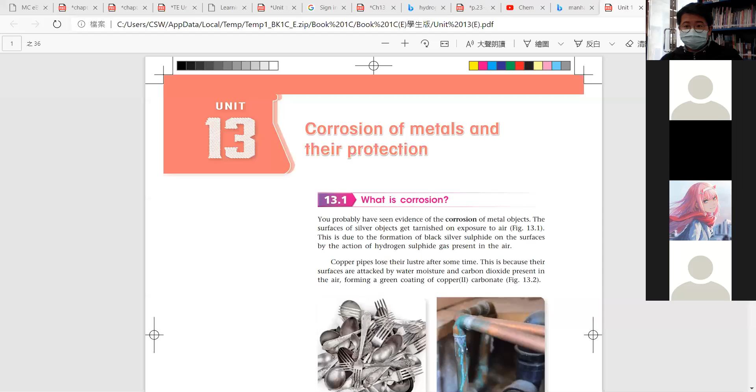Okay. Absent. Now today, we would like to have an overall revision on chapter 13. Do you find this chapter difficult? Not really, but you should know some of the key points about this chapter. Now, when you compare to the chapter on reactivity of metals, it also talks about the chemical reactions of metals, but we focus on a rather slow reaction. Deterioration.

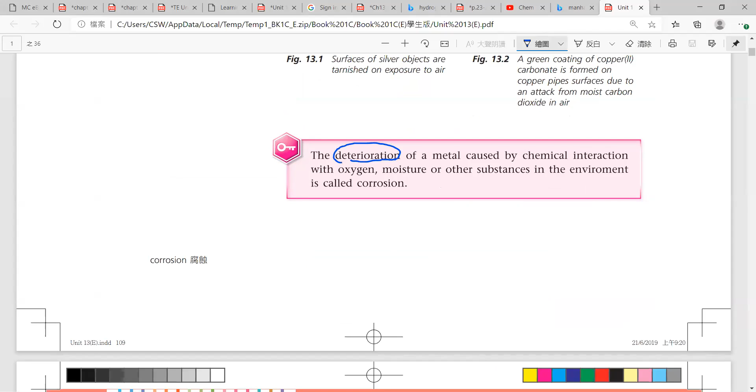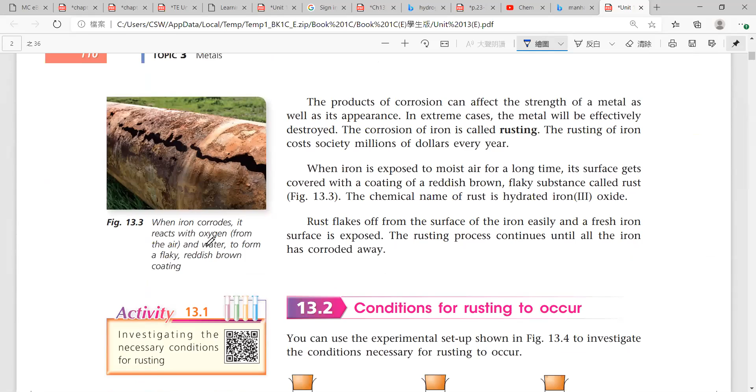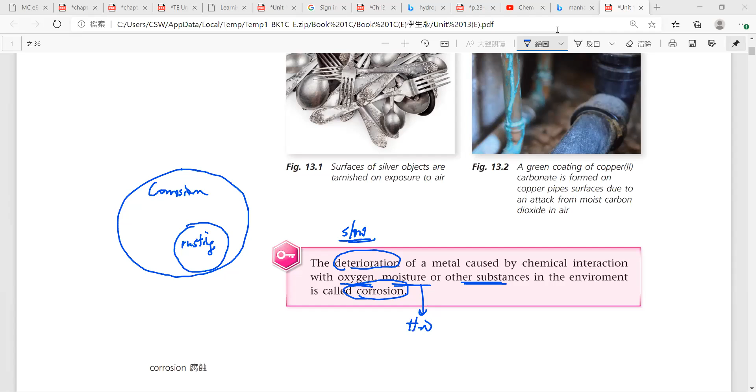Especially a type of slow deterioration of the metal caused by the chemical interaction with oxygen, moisture, which means water, and other substances in the environment. We call it corrosion. Now, corrosion and rusting are just a big circle and small circle. Corrosion is here, while rusting is just here. So what is the difference between corrosion and rusting in terms of wordings?

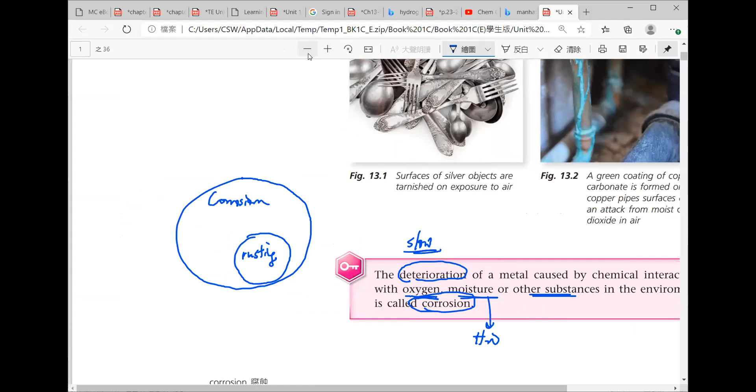You have to solve it, right? By typing on the web and searching, right? Can I have Leung Ka Kit? Tell me the difference between corrosion and rusting. Are you here? Corrosion 係好似大部分 metal 都係，而 rusting 就係即係 iron 啦。

So you pinpoint the use of these terms to tackle the oxidation of metal, right? All metals, when they react with oxygen or water or some other substances, we call it corrosion. And rusting is the corrosion of what? Of iron. Okay, so this is a very special term. Can you get my point? You can never change the use of this term if you want to talk about rusting.

So 生鏽. Why is it 鏽? We call it rust. It is something like a reddish brown crust. So if you want to talk about 鐵鏽, we call it iron rust. But of course you may think of some other term which borrows the same thing, 鏽. For example, have you ever heard of the term 銅鏽?

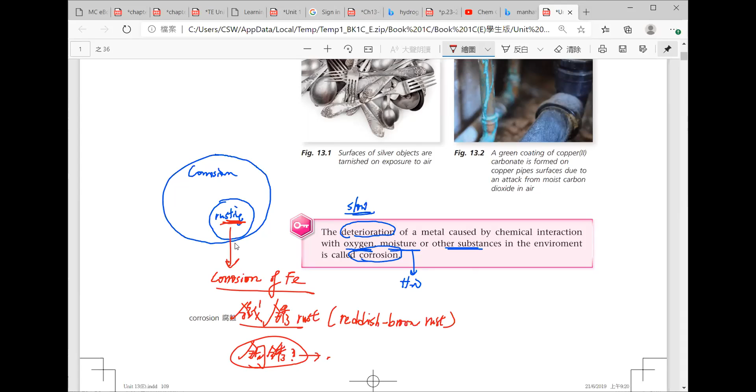I don't know. You don't know. You take a look at the book here, 銅鏽, on the right hand side of the book here. Oh, okay. Yes, it's green. It's green. So as said before, even if you want to talk about it, it is a type of green patches, right? Found it here.

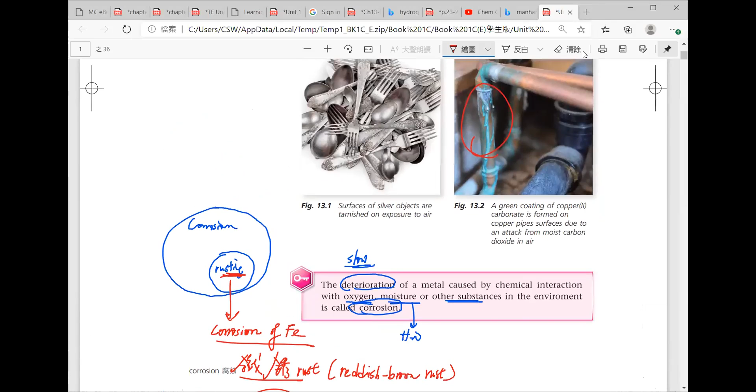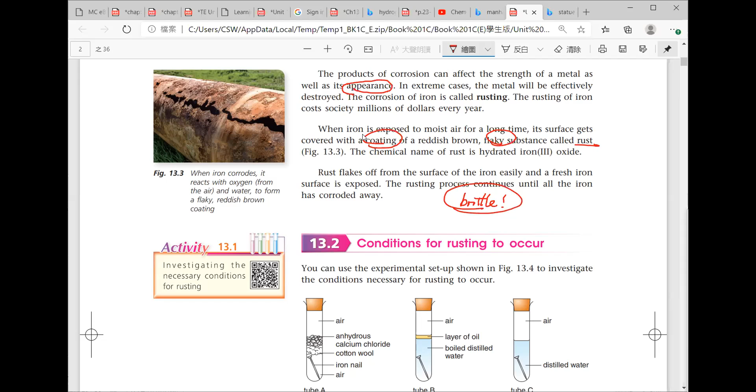We call it rust. But one thing that we find very terrible is that it is brittle. Compared with uncorroded iron, which is strong and hard, once it changes to rust, it is brittle. This is what we don't want, especially for iron objects with their own uses, like bridges, building materials, etc. So it raises some safety concerns.

If it is brittle, it cannot withstand so much force, so much weight. So all of a sudden it will break down. So this is what scientists, but also the general public, pay much concern to. It is also something about money. We have to preserve the form of iron.

But sorry, according to nature, iron will finally go back to its most stable state. It is rust. So we are now going to have a competition with nature. As the Chinese saying goes, 我哋逆天而行啊.

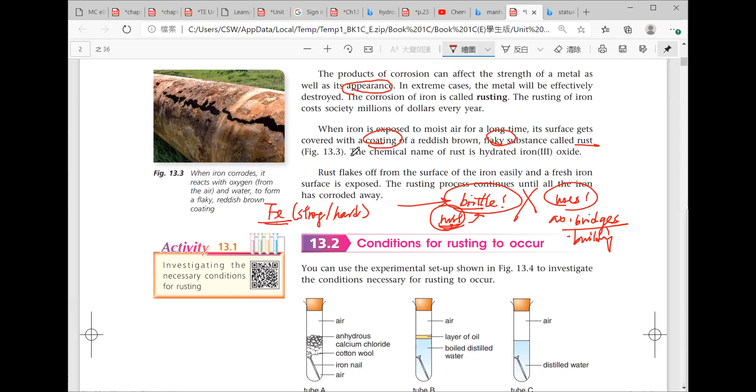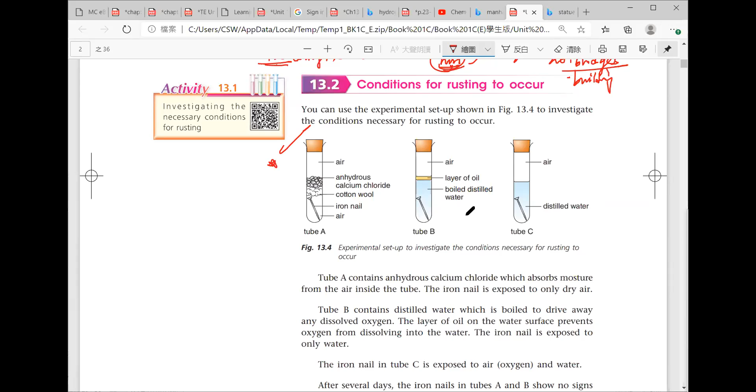So that's why we need to think of some protection method to slow down or even stop their corrosion, because it affects not just safety but also the cost. And in order to get to know more about that, you should know the conditions for rusting to occur. So you may see this diagram. Please put a star here; you need to pay much attention to the design of experiments, the purpose of those chemicals, as well as the results.

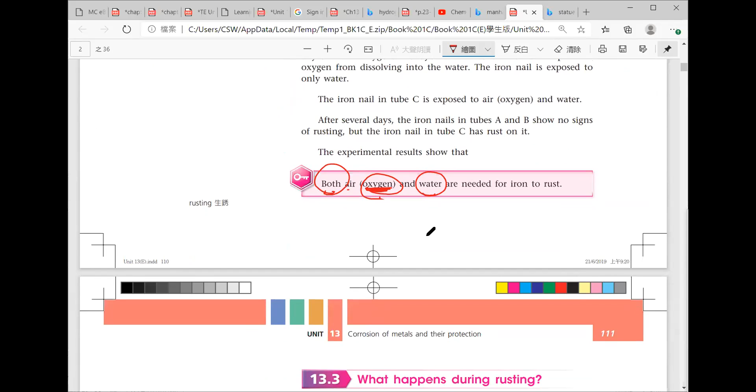So the result is that the essential factors are oxygen, circle them, and water. We need both of them present in order for the iron to rust. And second, for the rusting process, the shortest time for it to be easily observable is 1 or 2 days. It depends on the humidity of the surrounding environment. If it's very humid, in only 1 or 2 days you can see signs of rust, which as said before is reddish brown. But it won't wait for you for so long a time.

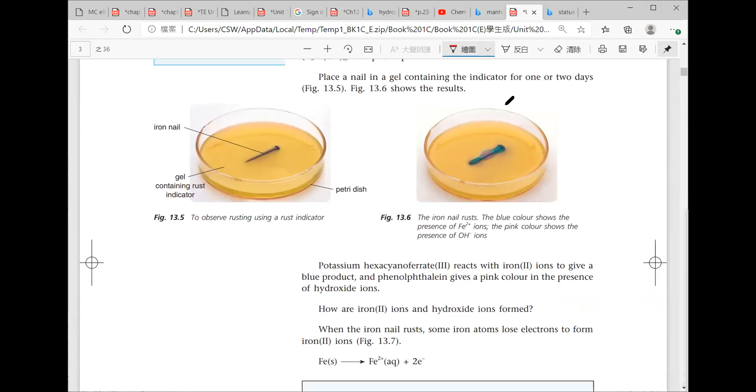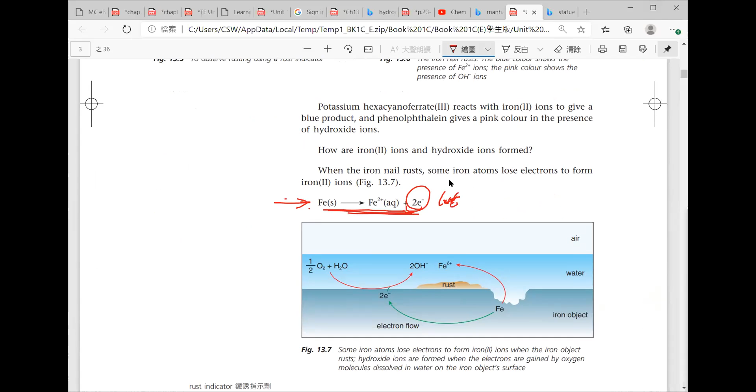So what we can do is spot the most crucial step. If the crucial step has started, it means that rusting will occur. So what is the crucial step? This is the first step, half of the first step: the reaction of the iron. They will lose electrons. And at the same time, the essential factors, oxygen and water, will receive the electrons lost from the iron to form hydroxide. So both chemicals are present in the very first step of the chemical reactions, and we are going to spot them out.

So that's why we have got the rust indicator, which has two components. Each one of them is used to test for each product. For example, potassium hexacyanoferrate(III) tests for iron(II). Phenolphthalein is used to test for hydroxide. They will turn the color blue and pink respectively. So what is that blue? A very special blue.

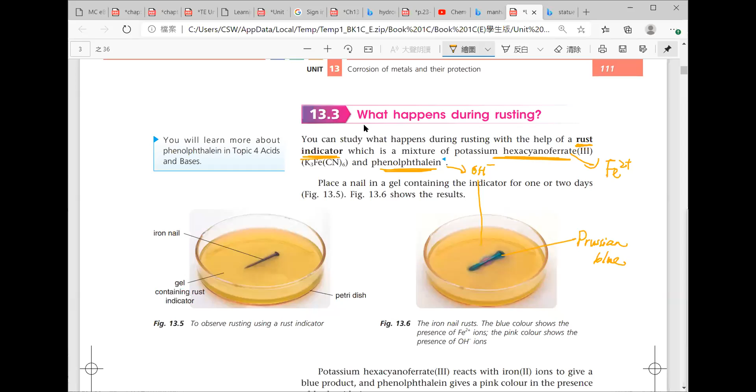Have you ever heard of the term Prussian blue? 普魯士藍. It is the color that you may find in some countries, right? They were very famous for having produced that blue. And hydroxide, once it meets with phenolphthalein, will turn pink.

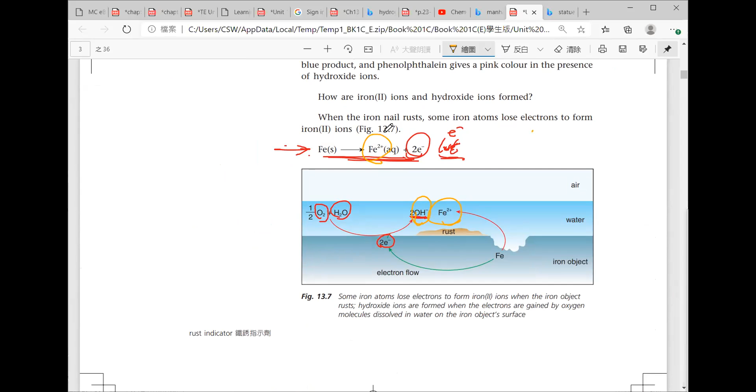And by having the indication of the first-step reaction, what I mean is hydroxide and iron(II), we would say that if I can monitor the first step of the reaction, we would have much belief that the subsequent chemical reactions will happen such that the iron will form rust. So those two equations you should memorize, and these equations should also be memorized. The steps in between are too complicated, so I don't want to spend too much time on that. Just focus on this.

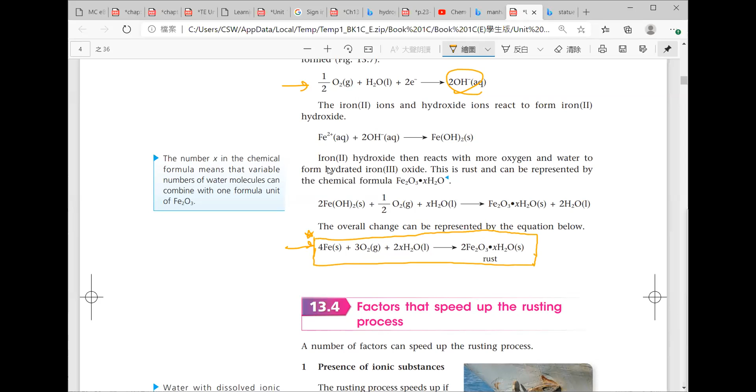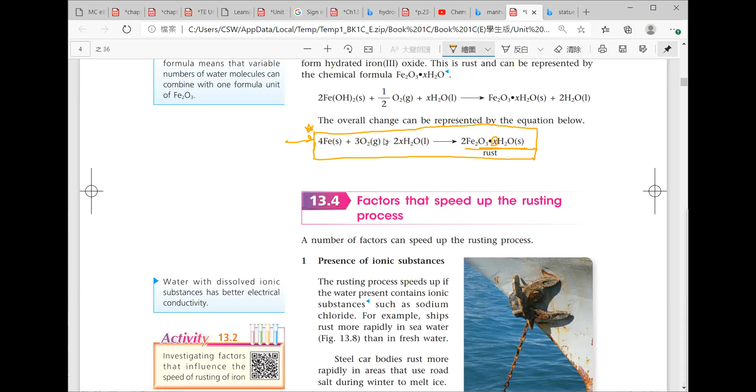So this is what you know about rust formation and the equation, and this is the chemical nature of rust. Can you see that xH2O? What does it mean? The water molecules are surrounding the structure of iron(III) oxide. They're embedded, being one part of the unit. We have got iron(III) oxide and water molecules in a fixed ratio to form this substance we call rust. And this is what you have to know.

How about 13.4? We need to get to know some of the factors that speed up the rusting process. So what is the use of this? If you know the factors that speed up the rusting process, we can know how to have a rust prevention method. Of course, you may think in reverse, right? You may think of factors that can slow down the chemical reactions. Can you get the logic?

If I know some factors will speed up, I know some factors can slow down. So we look for slowdown and prevent some factors that may speed up. By doing so, we can, sorry about that. Yep. And by doing that, we can prevent the signs of rusting.

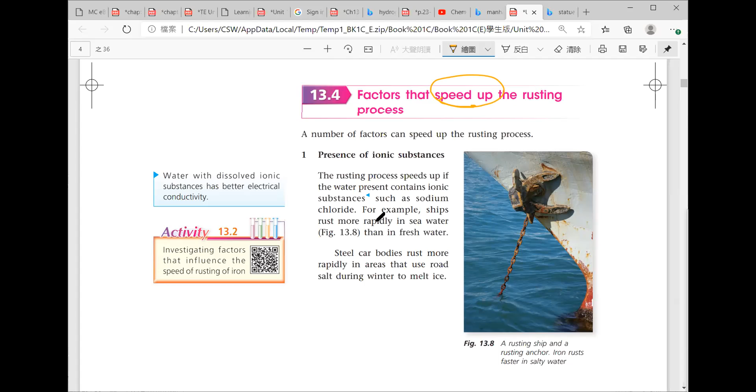For example, when you go to seashores, you may find some iron chains or iron objects easily go rust. It is because of salt vapor in air. Indeed, when you stand near the seaside, you may have some sea breeze, right? But you may also have got some salt powder, right? That mixed with the water in the water vapor.

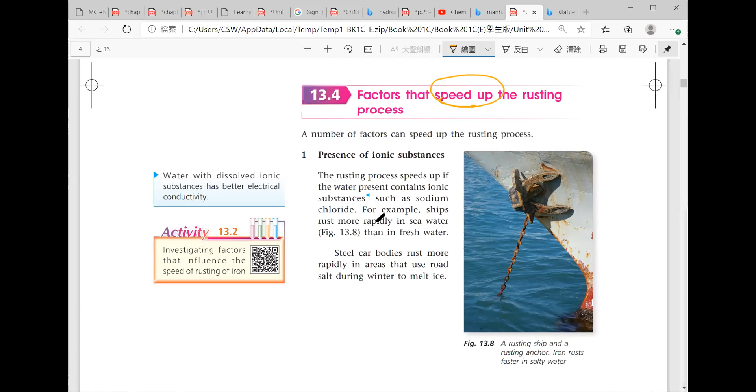So some of us may have the experience that your hair, when it has got dry, even though you did not jump into the sea, there may be some signs of salt. Okay, it's salty. If you rub it, you better not taste it, but you can sense something powdery, which is salt. With the presence of it, it will speed up the whole process.

Why? Anyone can tell why? Why does the presence of salt speed up the chemical reaction? Why? Have better electrical conductivity of what? Need higher electrical conductivity.

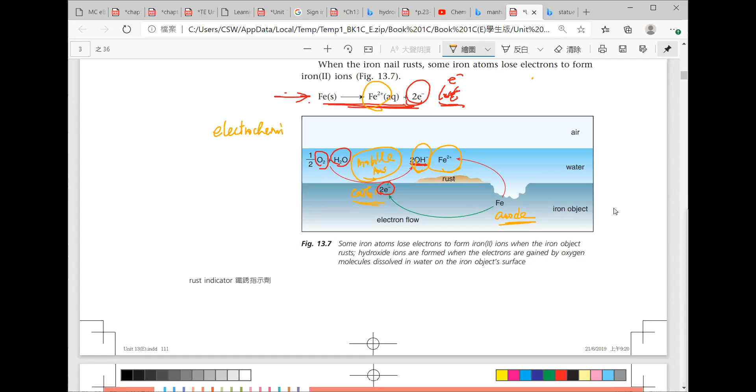Indeed, it is a chemical cell. In the whole process, we call that an electrochemical cell. What is an electrochemical cell, or a chemical cell? It is an energy converter which can transform chemical energy to electrical energy in terms of redox. It is a type of redox reaction.

So that's why redox reaction would be the core part, right? It involves an electron transfer from one place to another, in terms of gain or loss of electrons. So very often we will talk about gain or loss of electrons. So imagine a whole piece of iron object, some places would love to donate electrons, but some places love to accept the electrons. And it gives a place where the chemical reaction should start.

So for the chemical cell, what is needed? We need to have some positive pole and negative pole, so we call it anode and cathode. And also we need to have something we call electrolyte. Electrolyte, 電解質. So water here is called electrolyte. Just imagine that water seems like lemon juice. Okay, so we are going to do something like a lemon cell.

But in the past we thought of two pieces of metal, and they can generate electricity. This time the whole piece of iron, part of it is positive, part of it is negative, and they will undergo the chemical reactions. But of course, because we are now talking about the same material, the reaction would go rather slow. Okay, so they will find a place where they love to lose electrons.

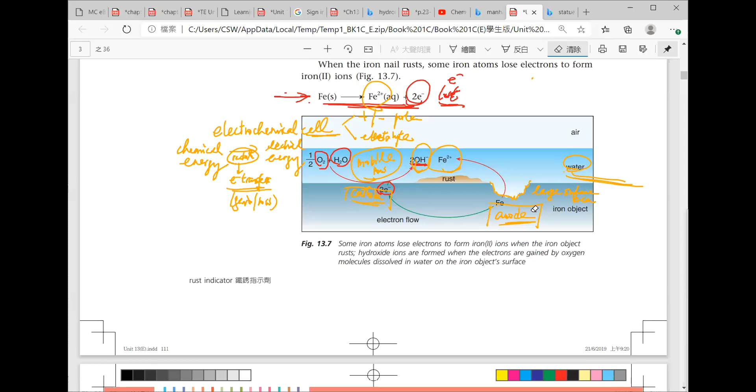So why is there a saying that they have got better electrical conductivity? Okay, somebody will say that there's nothing to do with the electricity. Not really. There is, because the principle of it is the chemical cell. Okay, can you get my point?

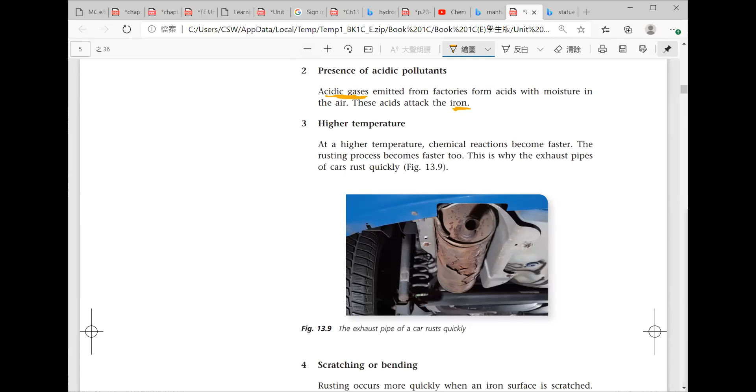And second, acidic substance. Acidic substance also provides ions, and also they will have a direct reaction with iron to speed up rusting too. Okay, thank you.

Now, higher temperature is also one. So how high is it? Higher temperature, the chemical reaction goes faster. Do you know? With an increase in temperature of 10 degrees, the rate will be increased how many times? Do you know? No? Double. Double. Yep. Increase the temperature 10 degrees, the rate will be doubled. So you know that calculation in

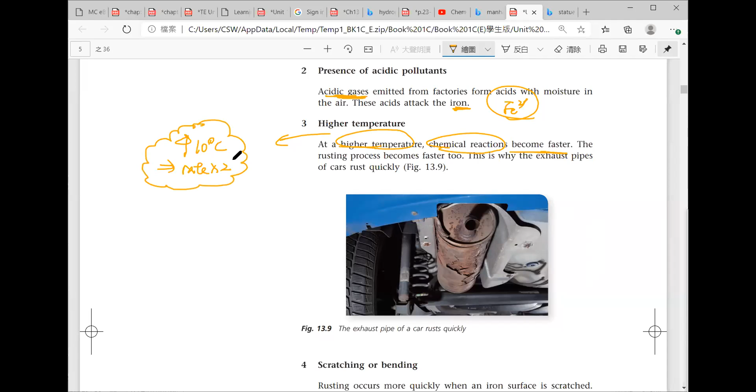Form 6, okay? So 3, as said before, scratching and bending areas, because the surface area of contact is larger. So it would help provide a place where the iron nail loses electrons more readily. You love to use that technical term, right? Lose electrons more readily. And of course, if you attach it to a less reactive metal, it's just like the competition of the tendency of losing electrons, okay?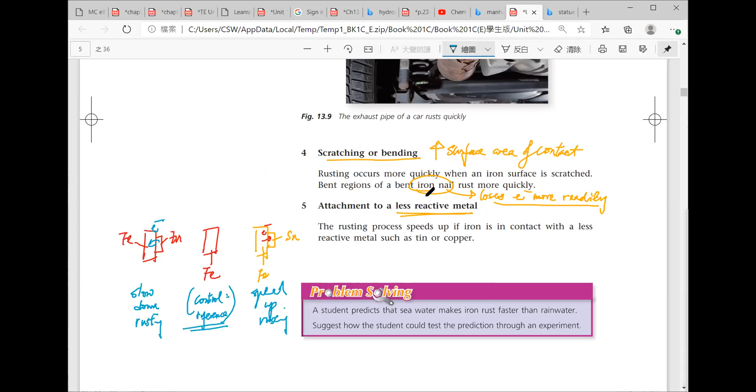So this is what we call a control, a reference point. Okay, you get my point. So this is what you know about this. And using this, you may think of some possible ways. So altogether, they have got 4 methods: protective coating, sacrificial protection, impressed current cathodic protection, and also alloy. Okay, we have got those 4.

Okay, so among them, for protective coating, there are so many different things. So whenever we have got a piece of iron, what is meant by coating? A complete covering, okay? A complete covering surface on the piece of iron, we call it a coating. It's up to you on the purpose. It can be paint, it can be grease, it can also be a piece of metal. Can you get my point?

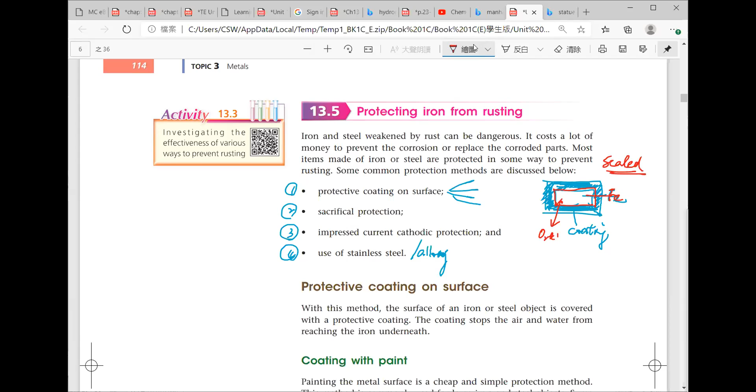Plastic is also possible. So we call it protective coating whenever you have another material that totally sealed, okay, sealed, 完全地包含晒, that surface, in which the iron itself cannot react with oxygen and water, they cannot come into contact with it. So we call it a protective coating. Can you get my point?

While for protection, you may have examples like paint, plastic coat, grease, tin plating, and electroplating, etc. But remember, tin plating refers to applying a coat of tin, right? How? There can be 2 ways. Do you know how to make the tin plating? It's called electroplating. Electroplating is one type.

But once you type this term into the web, you may also see the coating of metal. They would have 2 methods: electroplating and hot dipping. So what is the difference between them? They are not the same.

So what does it mean by hot dipping? Have you ever tried it? You go to the buffet and we have got a chocolate fountain, and you make a chocolate fondue. You put a piece of fruit inside and take it out, right? So hot dipping is a very similar principle.

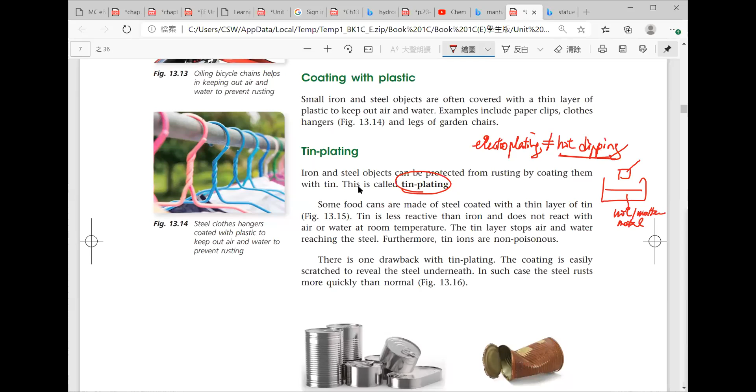So we have got a piece of iron object, and I put it into the hot molten metal, and then take it out and let it cool down. So it is what we call hot dipping. Can you get my point? So we call it hot molten metal, and you put that piece of iron into it and take it out when you're hot dipping.

But for electroplating, you need something like this. So you need an electrolyte, which contains that metal ion. For example, I want to coat it with a layer of silver. I may get silver ion.

Okay, the iron object is here. So by having the negative charge, it attracts positive ions and also provides electrons, so the silver ions would gain electrons to form silver, which makes a coating onto the piece of iron. So it is somewhat different.

Okay, in electroplating, I have electricity, I have electrolyte, and I use electrical energy to come up with a chemical reaction, to make a metal coating on that. If you use hot dipping, it's like chocolate fondue, and you put that piece of iron into the molten metal and then take it out and let it cool down. Okay, do you understand? There are two methods.

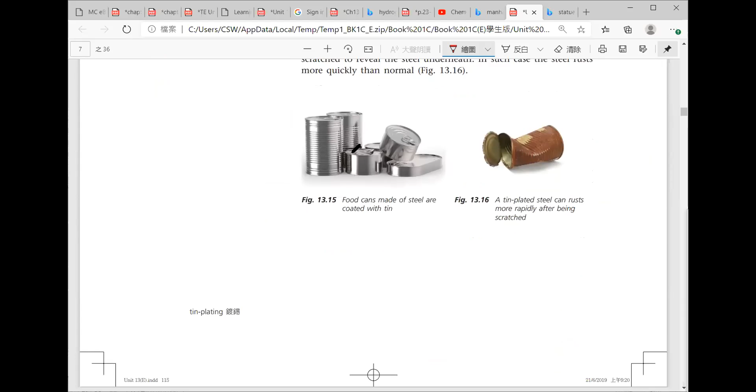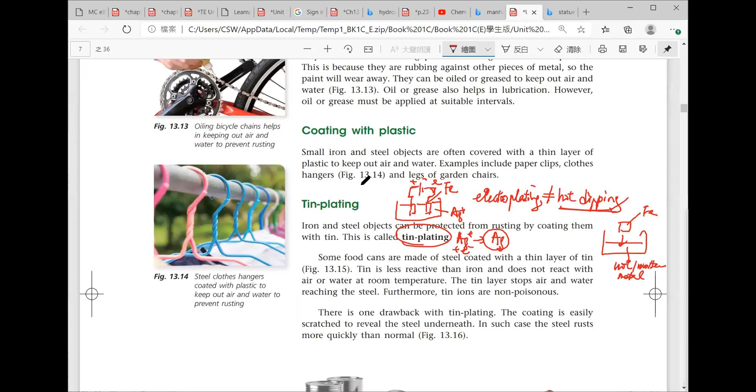So tin plating and electroplating are not separate methods. It depends on what tin plating they are having. Okay, it can be electroplating or it can be hot dipping. So remember, and we have got one more point, galvanizing.

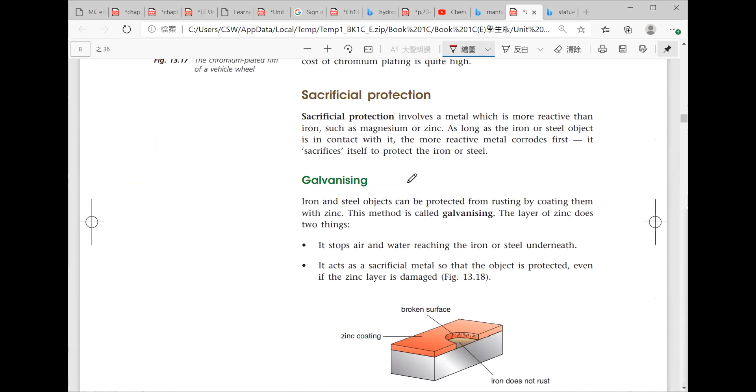Okay, so sacrificial protection. So this one, galvanizing, is another thing. Now remember, galvanizing itself also belongs to protective coating. All of you, could you please mark it down? Or galvanization, you have that term.

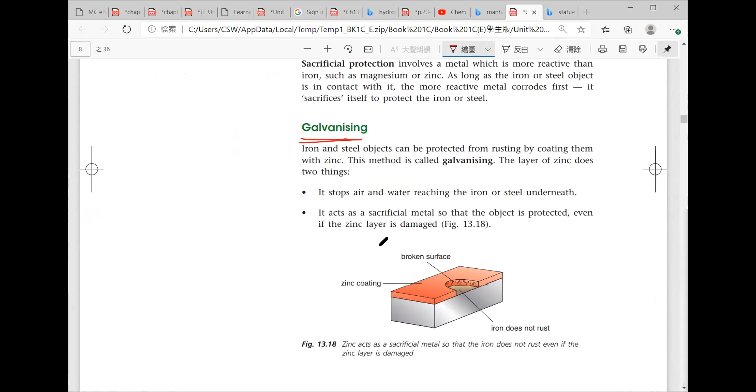Okay, so it belongs to this category, protective coating, not sacrificial protection. This is what I would like to clarify here. Unless we have got something broken or a scratched area, then it would perform sacrificial protection. If you have complete sealing of the iron object by a layer of zinc, we call it galvanizing, while the rust prevention method is what we call what?

And it is a type of protective coating. It's like a protective coating. So for zinc, you may find it difficult to electroplate because zinc ions are too stable. They'll be less easily reduced. So the galvanizing process may need hot dipping. Okay, so this is what I would like to share with you.

Somebody wanted to ask one more point about the difference between hot dipping, galvanizing, and electroplating. For example, if you want to coat a piece of silver onto it, you will easily use electroplating, because silver ion is rather unstable and wants to go back to silver. But if you want to melt a big tank of silver to do hot dipping, what will happen? I need a big pond of silver. So compare the electrolyte and the whole pond of silver. Which one is more costly in terms of buying raw materials?

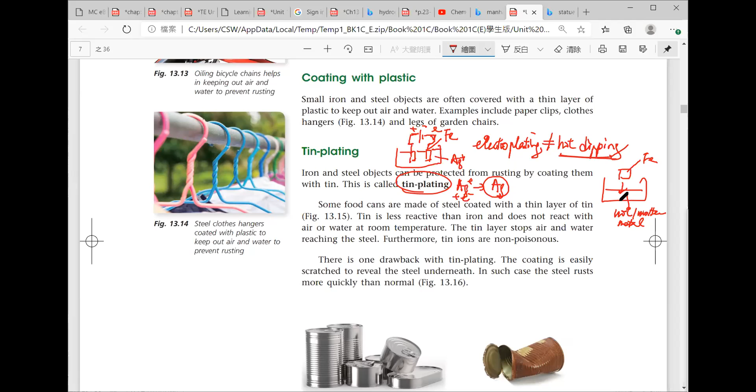Of course, you know it, right? You can get what I mean. So it is related not only to quality, but also the cost, the raw materials. What will happen if I have copper? For the solution, I have copper(II) ion solution very easily. But a big tank of copper, wow, very costly. Not to mention the melting point of copper. Do you know the melting point of copper? How many degrees? More than 1,000. So you may add it to the cost.

Okay, so galvanizing. Remember, whenever the protective coating doesn't work, you need to think of sacrificial protection. And for this part, instead of replacing the whole bottom of the ship, we would love to replace the zinc block instead. 你冇理由成架船走去換咗佢。 So why not just replace the sacrificial metal?

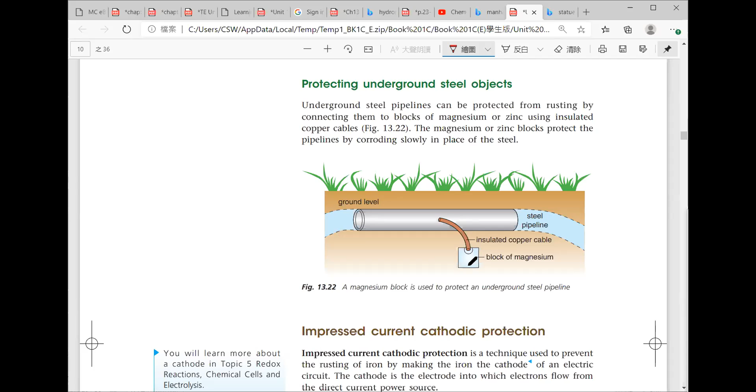And also the underground pipe. Instead of replacing the whole steel pipeline, why not just replace a block of magnesium? Can you get the whole logic? So this is what I would like to share with you about that. Impressed current supplies electrons to it, which helps slow down the losing of electrons. And the use of stainless steel: we rearrange the packing structure so as to improve the corrosion resistance of stainless steel.

And remember, why do we need to do so many things? Anyway, you have to pay because you are now going against the nature of iron. Iron, even though it is placed in the middle of the metal reactivity series, tends to form compounds. But for humankind, we extract the iron and find that pure iron is very useful because of its hardness and high strength. I love to use it. But finally, the iron object will go back to its oxidized form, which is somewhat brittle, and it will affect not only its life but also safety.

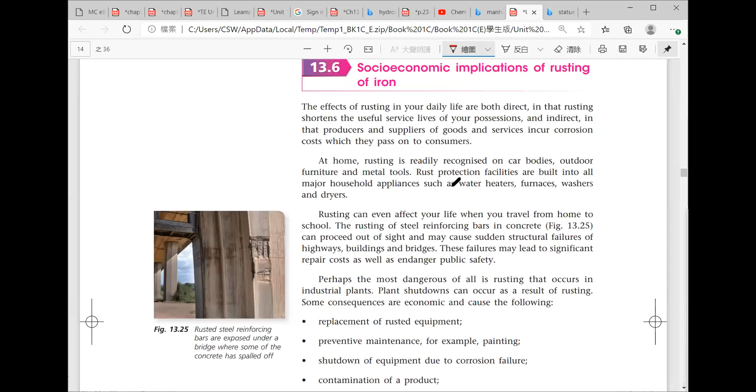So that's why we need to pay something to slow down that naturally occurring change. We call it deterioration. We call it corrosion, and for iron in particular, rusting. Can you get my point? So that is the whole flow of this chapter. We usually love to compare this with aluminium. Have you made that comparison table in the previous lesson? Not yet? Yes, comparison, you know it? So I will just go back to this.

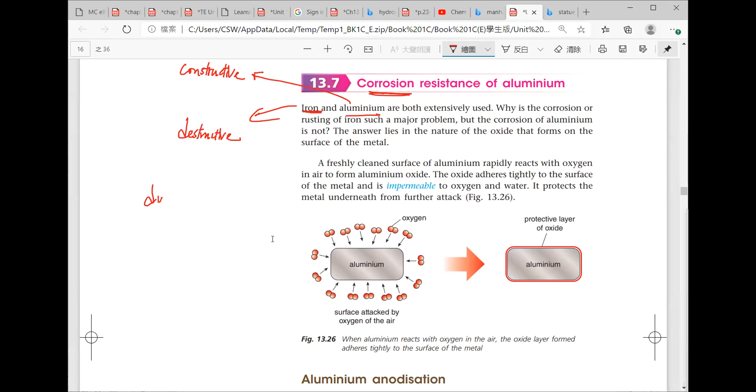So the corrosion of iron and aluminium is different. Corrosion of iron is somewhat what we call destructive, while corrosion of aluminium is a type of constructive process. In terms of what? In terms of durability. 耐用性. In terms of how long the life of a piece of metal can be used as a tool.

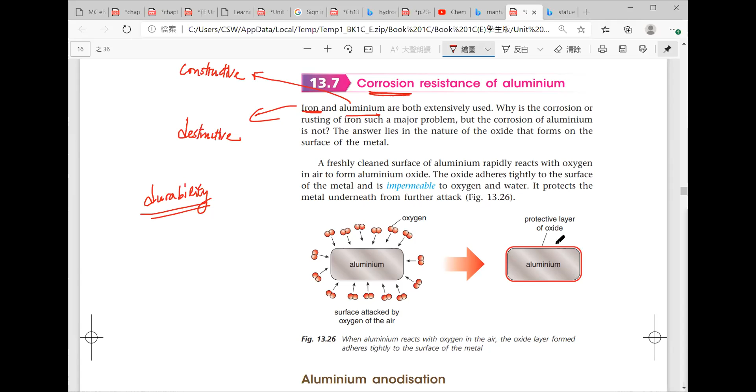So corrosion of aluminium is constructive because of the nature of the oxide. The oxide is impermeable to oxygen and water, so it serves as a protective coating. Oxygen and water cannot go through and reach the aluminium. And it's not just plating; aluminium can also undergo this type of chemical reaction to enhance corrosion resistance, by increasing the thickness of the oxide layer. Again by electrolysis, I put the aluminium object as the anode.

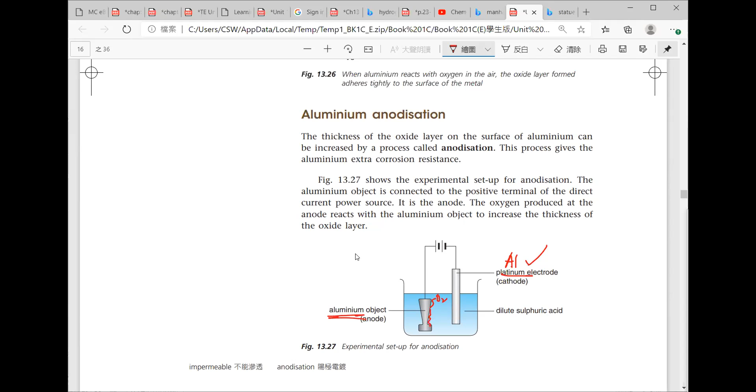I put it inside the sulfuric acid, and we have got some chemical reactions to form oxygen gas, while the oxygen gas rapidly reacts with aluminium to form aluminium oxide to make the oxide layer thicker. During the process, the oxide layer is quite porous. If you take a look at it very closely, we've got some holes inside.

Before they are sealed as a coating on the surface, we try to make use of this time to add some dye to it. And we would have this dyed anodized aluminium product. Okay, during the process, the pores will help absorb the dye. Do you see why?

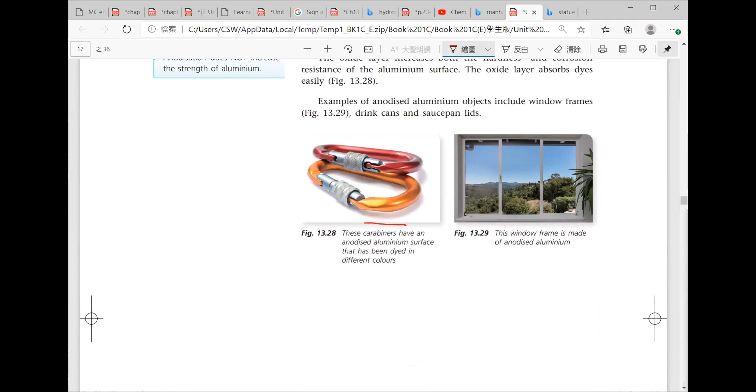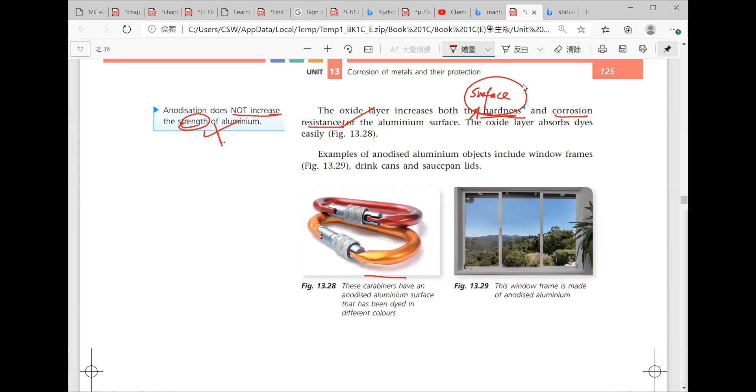Okay. Now remember, hardness is not the correct answer, but surface hardness is okay. Corrosion resistance is okay. Strength will not be increased. And the oxide layer helps absorb dye easily, so we will get different colors. Any questions?

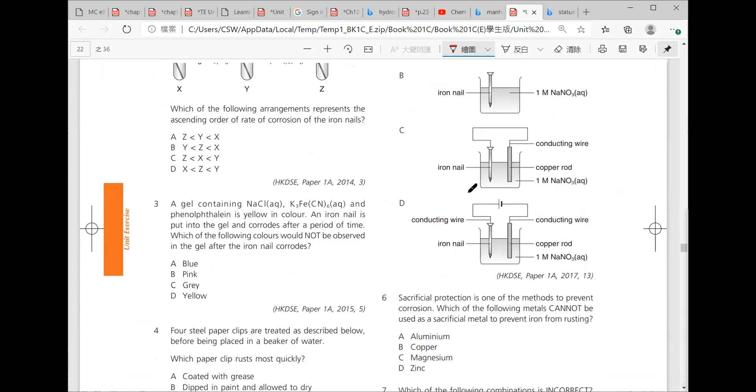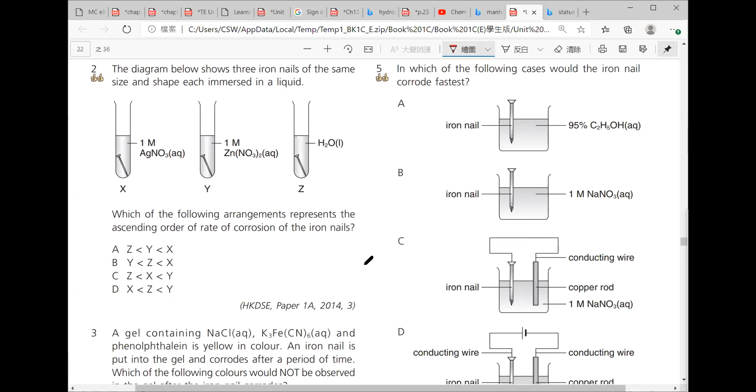Now, go back to MCs. We have got the quick start. Have you done all the MCs? Not yet? Let's have a try. On question 2, students should be ready. I just want to double check who doesn't answer. Trần Nói Thành. Question 2. Page 130. Question 2. What do you think? Okay, let me think.

I think it is... wait. I think it is B. You think it's B? Why? Why is it B? What is the control? Which one is control? X, Y, or Z? Z is the control. Yeah, so this is the reference point. It's the control.

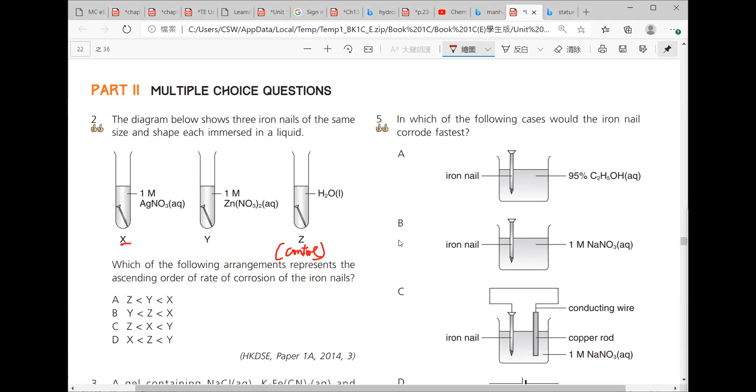So that iron nail will finally rust. This is the reference point. So for comparing X and Z, which one will have faster rusting? X, right? Why? Because the silver nitrate can increase the electrical conductivity of the water, which makes it easier for electrons to move from iron to oxygen. Or it is a type of electrolyte, an ionic substance, which will increase electrical conductivity. Correct. So it will speed up rusting.

The iron nail is iron, of course. Iron and silver ions, what happens? What is the chemical reaction? Iron(II) ions and silver. So is that reaction rusting? No. What is it? Displacement reaction. When you compare rusting and displacement reaction, which one is faster? Displacement reaction. So that's why X will be corroded faster, because X undergoes displacement. X is faster than Z. What's next? Y.

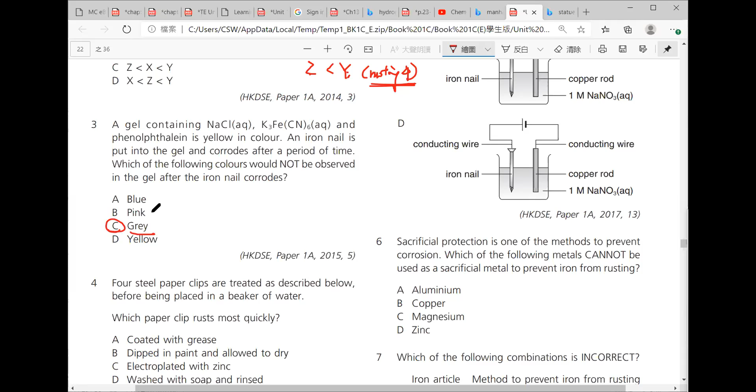Gray? No. There's no gray. But yellow is the rust indicator color. Blue is a combination between iron(II) and hexacyanoferrate(III), and pink is a combination between hydroxide and phenolphthalein. So the answer is C. Question 4.

Mr. Tang. All right. Question 4. What do you think? B. B, dip in the paint and allow to dry. Which one will rust most quickly? So what's the principle? 1, 2, 3. The first 3, they all apply a protective coating.

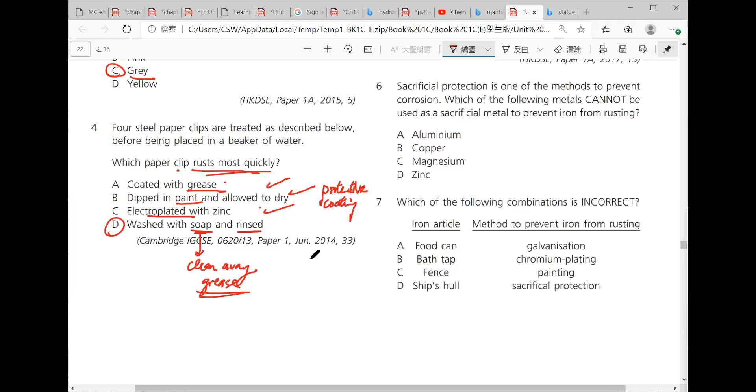No matter what method they are using, right? Grease, paint, electroplating, they are all just protective coatings. How about D? D, wash with soap and rinse. Soap to clean away what? To clean away grease. Or maybe in the air there are different materials, and it gives no protective coating. So D will rust most quickly.

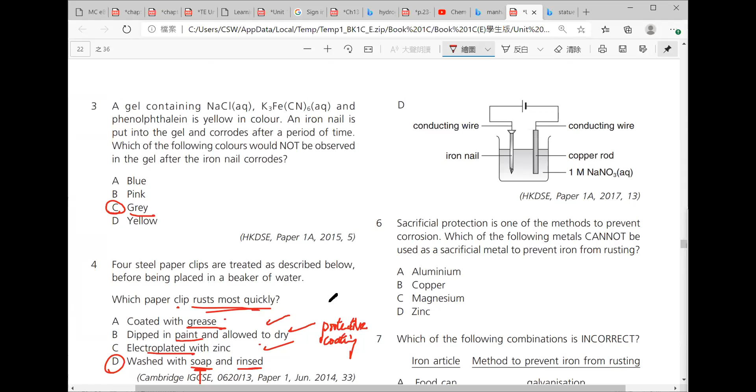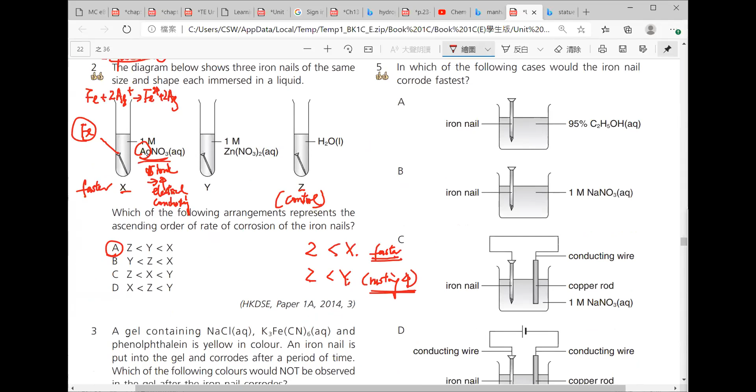Dang Junhei, question 5. Junhei, are you here? 好似好困難咁啊！你哋啫。Question 5.

What is meant by cathodic protection? Many of you say D. Why? Because it's plus, it is minus. What is the direction of electron flow? Instead of having cathodic protection, this is a process which speeds up the losing of electrons. It's anodized. Yes, it's the other way around. So aluminium can be anodized to make the surface harder. You can improve the corrosion resistance.

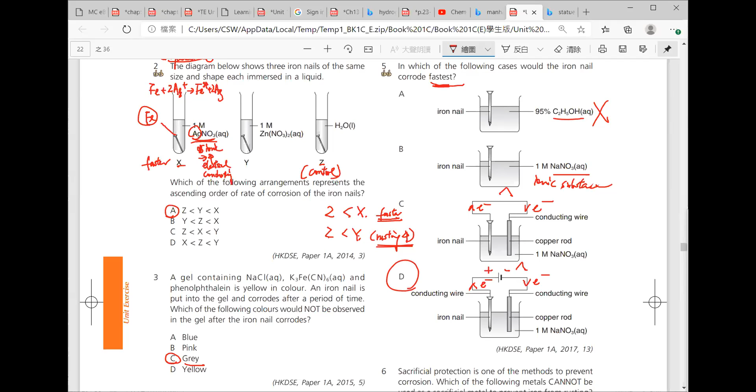Nam Seng Hon. Question 6. Copper. Copper, yes, that's right. No, it cannot be used. It would speed up the corrosion of iron instead. 7. Choose the one that is incorrect. A. A, okay. Galvanization, which means zinc. Zinc ions are toxic. So never put it in the food can. You'll be intoxicated. Question 8.

Hoàng Nhật Long. Hoàng Nhật Long, are you here? 係睇緊。係。The reactivity of aluminium is compared. Can I have the other 3 students please prepare the final 3 questions? Long for question 9, Lý澤星 10, and 吳漢一 11.

B 啊。Question 8 is B. Yes, correct. We've got a coating of aluminium oxide, a protective coating. Question 9. Who answers question 9? Is it Long? Question 9. I think it's B. Is B correct? Anodizing, the deposition of the aluminium oxide.

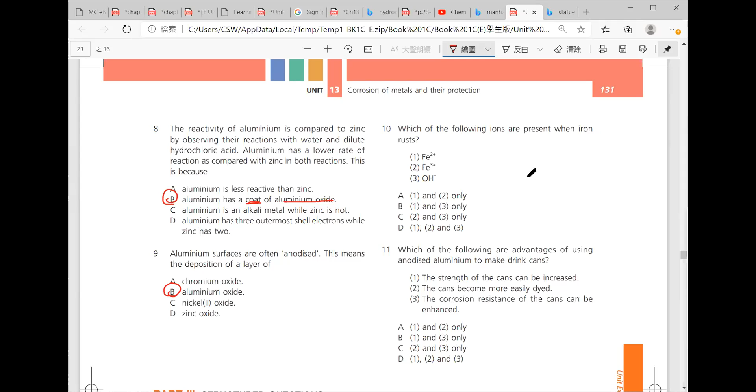Question 10. Lý澤星, what do you think? B? You think it's B? Of course you think so, but iron(III) ions are also present. The answer is D. Ions are present in iron rust. Why? Hydrated iron(III) oxide. 呢度未有 iron 3. The answer is D.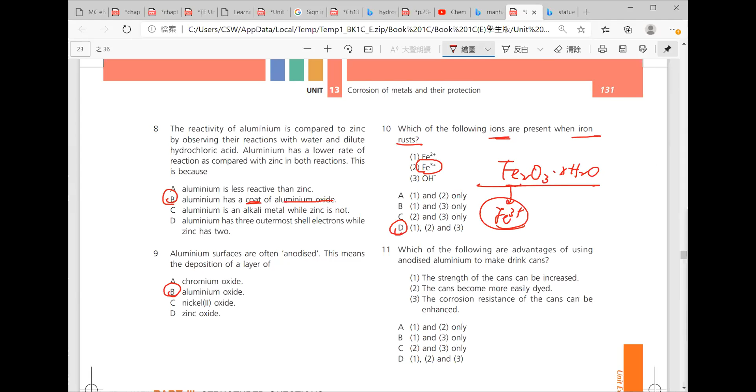Final question. Which of the following are the advantages of using anodized aluminium? Common misconception here, right? It's C. Remember, the strength cannot be increased. So I would like to ask you guys to put a star here. Okay? So in short, here comes the revision of rusting.

What do you think? Can you get the whole logic of this chapter? It's more related to daily life. And of course, this should be backed up by some chemistry. And I'm sure your teacher, Mr. Lam, has taught you more about the way to answer the long questions. I'm sure you can have an easier life in your chemistry quiz this week.

Don't pretend you don't know anything. You can't escape the chemistry quiz. This Friday, chemical reactivity, and next Friday, rusting. I'll give you 2 weeks to prepare, and next lesson we will go over the mole calculations, the last chapter in 1C. We go back to chapter 12. An exciting one, and we'll have lots of quizzes for chapter 12. I'm sure you will have an easier life.